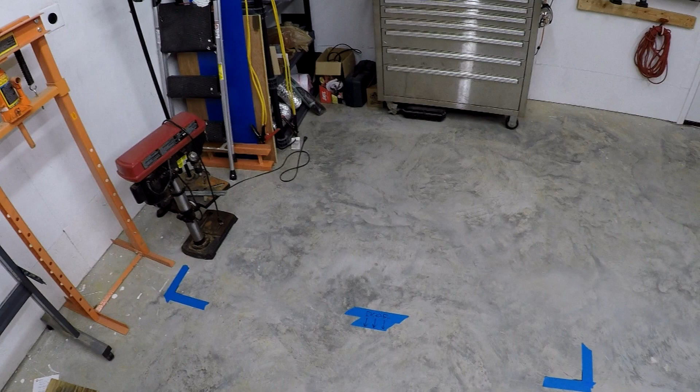I might still push it this way to get some more room down the side of the machine, as well as push it back away from the wall to provide more room behind it, just so I can get all the way around and not need to squeeze or not be able to access something.

This is probably a good spot too, because I'm right by the breaker box. I can add another breaker, an outlet, and other wiring for the machine itself.

So with this also being here, all of this needs to move probably back over to where it was when I first moved in. But this is, I guess, a growth of a shop. So you got to figure out where things go and rearrange as you move along.

So this is where it's at. This is where it's going to go approximately. Let's go into the office now, and I'll go through the numbers and how I figured out what I got that's going right here, and I'll tell you what it is too. All right, give me a minute.

All right, so I bought a machine. I finally did it. I've been in the market for a while trying to find a machine. I've been looking at hobby mills, prosumer mills, trying to think of maybe possibly doing a DIY, because I like doing the wiring, the drivers, and all the motors and everything. Getting like an old Bridgeport or something. I've also been looking at older used machines.

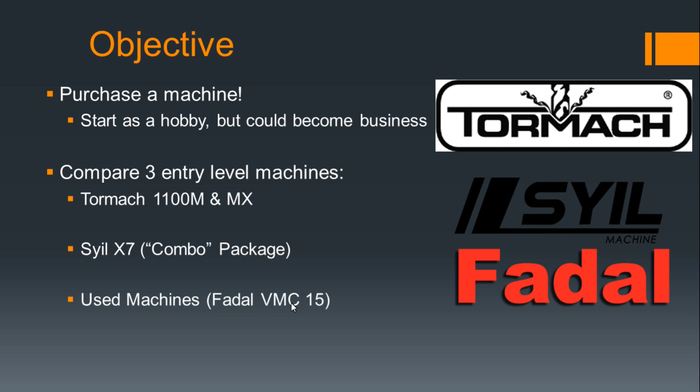So to try and figure out how to evaluate all this, I came up with some criteria to compare them all. Basically, performance, size, maintenance, and cost. And for each one of these, I wanted to pick the one that met the most number of criteria, as well as I have over here an extras list.

Things that are more or less nice to haves right now. I don't need them, but they could be something that could sway me, one way or the other.

I won't read through all of these, but basically, the more important ones are ATC. It's not really important to me right now. Now, if this became a business, it would definitely behoove me to have an ATC.

Rigid tapping, that's something that I could go either way on. I could use a compression tension head to do tapping if I don't have, say, on a Tormach.

But another one is maintenance. I want to be able to have something that I can work on myself and not need to call a tech to come out to my house to do it.

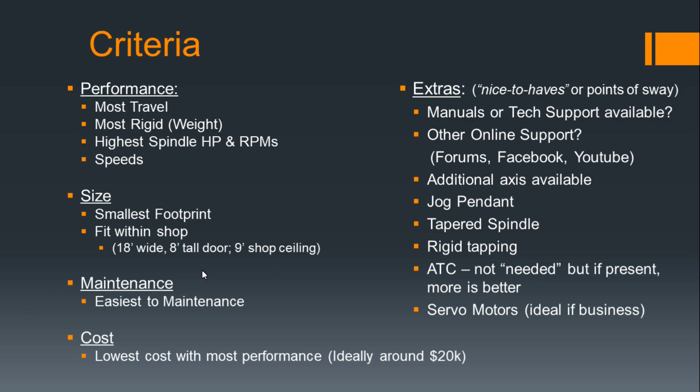So, before we get into the information, all the data, all the pictures I show in this came from either the manufacturer's websites or the dedicated Facebook groups for each manufacturer, which is where some people have files, documents, and other users have questions that they have answered. So with all that, make of it as you will.

I'm not trying to rep any one company. I'm just showing you what I use to go through and figure out what and how to get a machine.

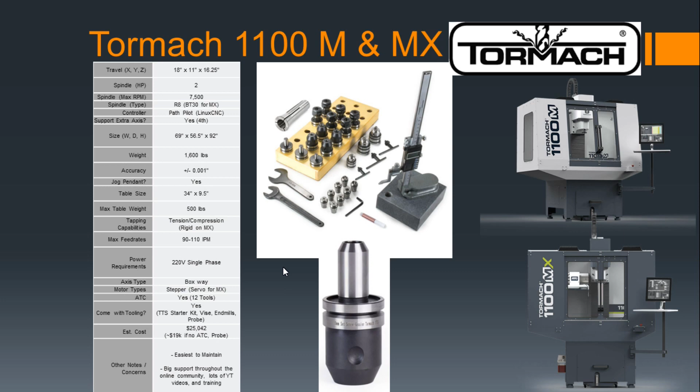All right, so starting off with the Tormach 1100M and the MX. This is probably the first machine I became aware of that fit my size and budget, or was close to it. I know there's a big online support for this, a lot of YouTube channels, a lot of forums.

This is more or less a hobby, a high-end hobby mill, I'll say. The big things that got me, that I was looking at, was the spindle horsepower. This has got 2 horsepower. The previous models, the PCNC 1100, had I think a 1.5 horsepower.

Max RPM is 7,500. One thing that I didn't know until I started really looking into this machine is that it had an R8 collet system. So instead of having a normal, say, BT30 or some kind of other tapered tool holder, it actually had this straight shank that goes up inside the mill head that it grabs. So that's something I've heard good and bad things about.

One good thing is that I know that it locates here on the Z, the shank face. This is also how you can set it manually if you don't have a tool setter inside the machine.

Going down, they have their own controller. This is Path Pilot, basically Tormach's controller that's built on Linux CNC. They can support up to a 4th axis. The weight is 1,600 pounds, which is I guess a decent size for a smaller mill.

All right, so after I looked at the Tormach, I went on to Syil. This is a little bit bigger of a machine. Where's the weight? I think weight is, oh, here we go. So it's all in metric because it's from China, so they sell it like that. There is some U.S. reps in a Facebook group

that supports this, but this comes directly over from China. So compared to the 1,600 pounds of the Tormach, this is almost 3,000 pounds, so it's almost double the weight. One good thing was the max RPM was 10,000. It had an extra horsepower. There's a little bit, I think, a bigger travel on this machine compared to the Tormach.

Accuracy, this is something that I got from the Facebook group. This is Xu Shuo, he's I guess the owner of the company. He posted this, and it said the biggest accuracy or repeatability error was 0.009 millimeters. This is something that seems really accurate for this type of machine. So I don't know what the tests were, feed rates, if there's anything particular where you had to go slow to do that, or that was going fast, whatever. But so I'll put that, it seems really accurate, but I'll let that be.

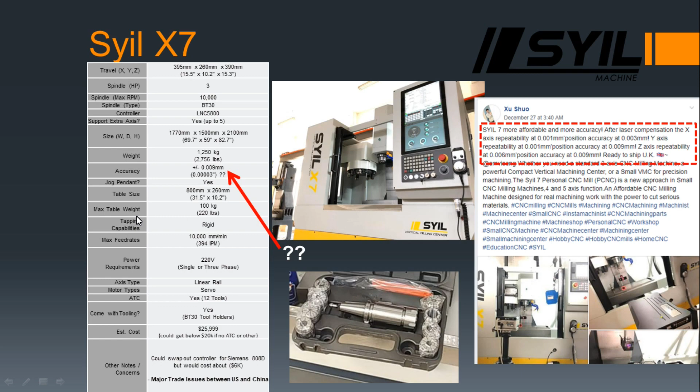It comes with a Cat 40 spindle, 7,500 RPMs. Horsepower, this is something too, if I were to ever make this a business, this is nice to have: 15 horsepower if I run 3-phase, or about, I think, 9, possibly a little less than 9 if I switch it over to single phase.

Weight, out of the three this weighs the most, 5,500 pounds. That's a good amount of weight. Rigidity is good. Accuracy, per their website or their actual manuals online, is 2/10, which is plenty good for me for a home shop.

Being a used machine, I wouldn't expect it to hold this. I'd probably have to, whether it's replace ball screws, figure out how accurate it actually is at the moment, and then either use backlash compensation or replace hardware to get it more in line with this.

It comes with servo motors on all axes, and it has an ATC with almost 10 more tools. It's got 21 tools that it could hold within the tool changer. Oh, jumped ahead a little bit.

Estimated cost, I've seen these go online for $10,000 to $14,000-ish. There are some caveats though. These are older machines, so you need to be aware that you might need to replace some cards, hardware, or motors, just because of the age. And you don't know what the condition of this machine is and what it went through with its previous owner, whether they crashed it or had any issues.

One good thing too is all the manuals are available online. So all the maintenance manuals, all the setup manuals, everything is available online.

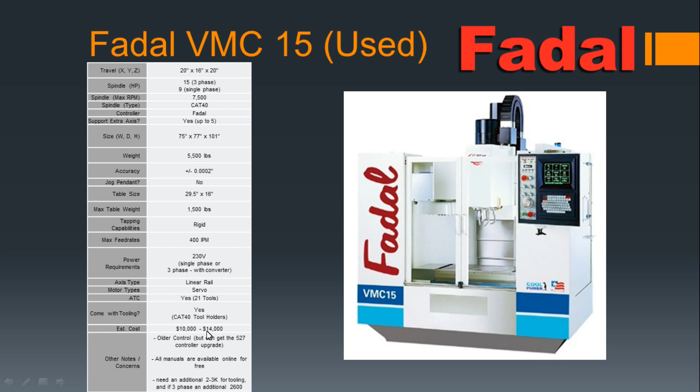One thing though, with this machine, if I were to get this, I have to spend probably $2,000 to $3,000 for tooling to set it up - vise, end mills, indicators, whatever. And then if I wanted to run 3-phase, I would need a converter, so that would be an extra $2,600. So maybe say five grand extra for this machine. That would probably put this in the $15,000 to $19,000 range.

All right, so comparing all three, we'll go to this slide. I highlighted through all these columns, these are all the properties for each of the machines. The yellow is the best option out of the three, and the orange ones I highlighted are more nice to haves. So basically the totals come out to be: the Tormach has 2 of the best options and 3 nice to haves, Syil has 2 and 7, and Fadal has 6 and 7.

So with that, with the biggest factor also being price for me, I chose the Fadal VMC 15. This is just because right here, this is the best price for what you get.

With that comes that concern with the older controller and components. I need to figure out if I need to replace anything. When I went and saw this machine, I've already bought it. I'm just waiting for it to be delivered.

I actually measured each of the axes and saw that I probably most likely need to investigate the Z-axis more, because it had about 3 thou of play. I've heard the thrust bearings may need to be replaced, but that's something I need to look into. The X and the Y were within, I think, half a thou, but the Z-axis lost 3 thou going back and forth, up and down.

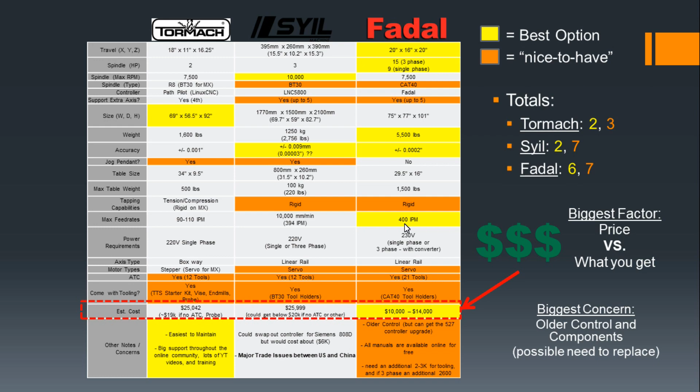So with that, I now need to buy tooling - a vise, I'm looking at either Orange Vise or GMT or some other ones out there. Looking at end mills, and I could get a face mill for this guy down here. So I need to look into tooling.

I also need to figure out some post-processor stuff. I know with this older control, some people are posting from Fusion 360 to get this to run. I need to figure that out.

I also need to get some way to connect to the machine, because right now there's no way to connect. I think there is an RS-232 port on here, but I need to figure out how I can communicate through some intermediate device to my computer.

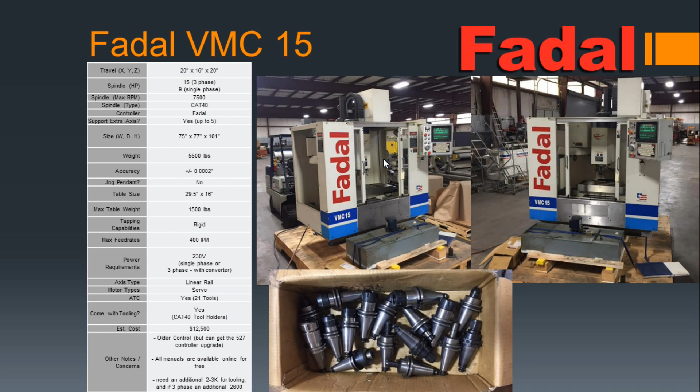So delivery is next. After that, we're going to go through the setup - wiring, tooling, coolant. Here's the coolant tank right here, this will go behind it. As you saw in the very beginning, I need to make room for all of this. I might move it away from the wall in my shop.

And then one of the biggest things I need to figure out is understanding this control. I've dealt with more up-to-date controllers, say Mitsubishi or Siemens, maybe even some FANUC-based controls I've used. I haven't used the Fadal control yet, but I know it's very similar to FANUC. So once we get it in, I'll be making videos of that, showing you guys that progress.